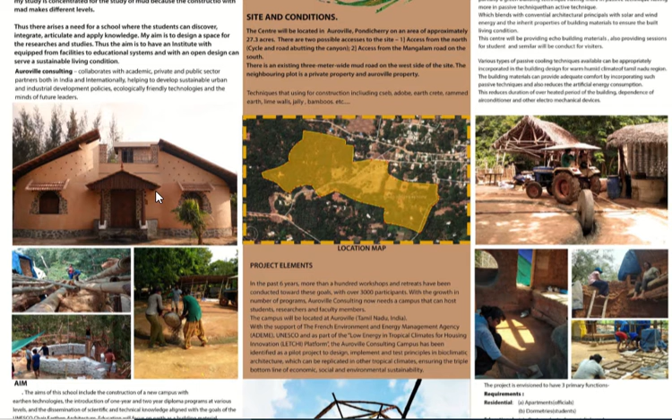This is a house made of mud. The walls use mud, and wood as purlins and other joinery. This picture shows that mud construction without any substitution is possible.

This house is in Auroville, where they practice different kinds of methods and techniques, improving the sustainable way of living and sustainable construction techniques.

The aim of the project is for the school to include the construction of a new campus with earthen technologies, introducing one-year and two-year diploma programs at various levels.

The objectives are to create a campus as a living laboratory of sustainable living, identify and implement good practices, and strengthen the design and construction of the campus so it is replicable in other tropical climate zones, taking present as well as future needs into account.

This is the site. It's in Auroville, having 27.3 acres of land.

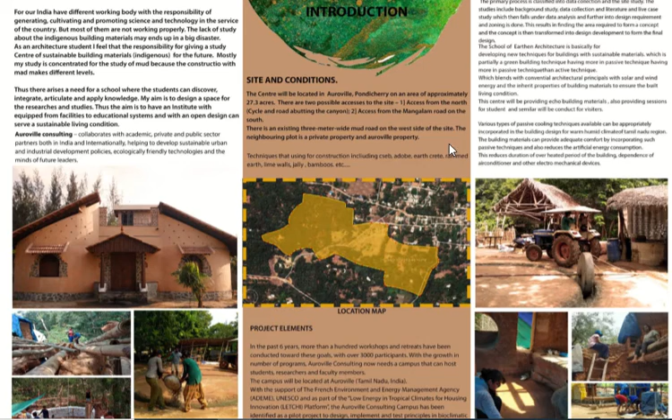It lies between the international and industrial zones, so the construction of the campus is possible according to Auroville laws.

The School of Earthen Architecture is basically for developing new techniques for building with sustainable materials, partially using green building techniques, with more emphasis on passive techniques than active techniques.

This center will provide eco building materials and sessions for students, and seminars will be conducted for visitors.

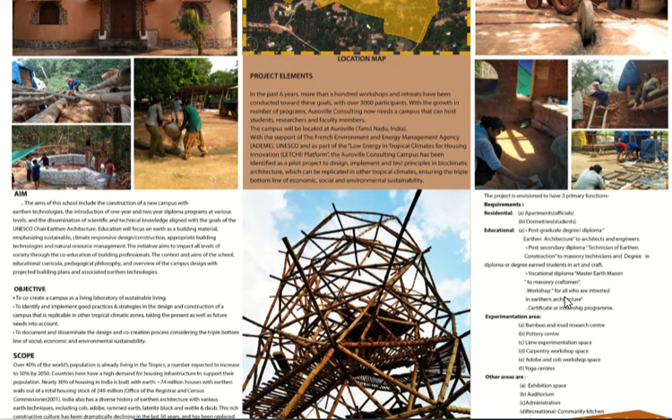The project is envisioned to have three primary functions: one is residential, another is educational, and another is an experimentation area.

Residential apartments and dormitories, and educational programs including postgraduate, post-secondary diploma, and vocational diploma levels.

The vocational diploma covers bamboo and mud, along with certificate and internship programs, and workshops are also conducted.

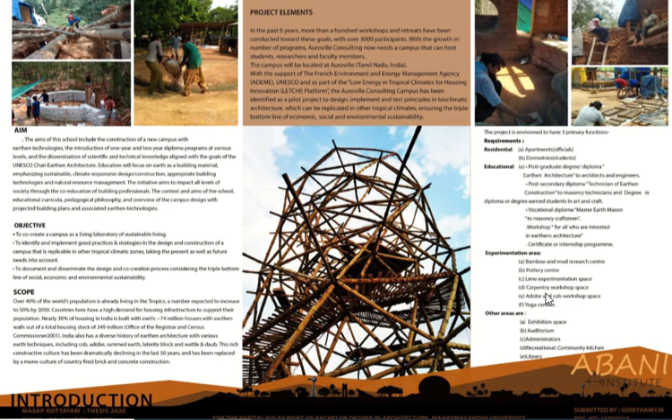Experimentation areas are also provided, like a bamboo and mud research center, pottery center, lime experimentation center, carpentry workshop spaces, Adobe cob workshop spaces, and a yoga center.

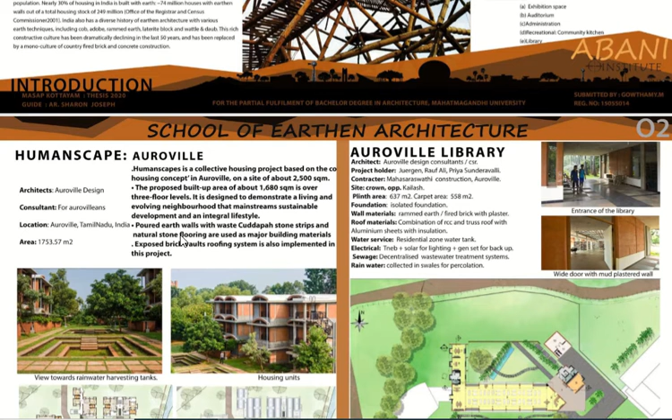The first case study I took is Humanscapes in Auroville. I chose this space because it helped me understand the materials they use for high-rise buildings as a sustainable material.

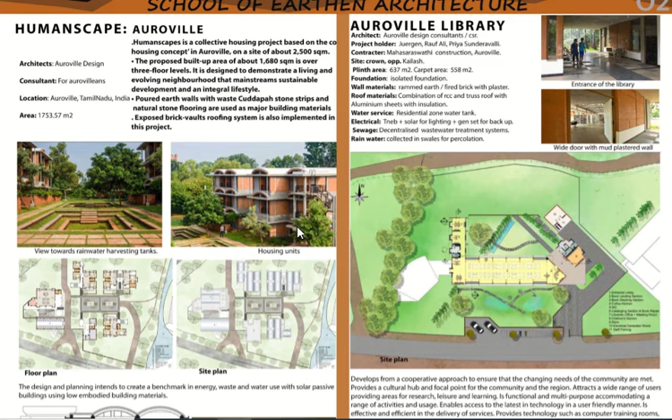They use poured earth and a vault roofing system, which helps in implementation and also helps bear the load easily.

Exposed brick vault roofing systems are also implemented in this project because they help with thermal insulation, and exposed compressed stabilized earth blocks are also used.

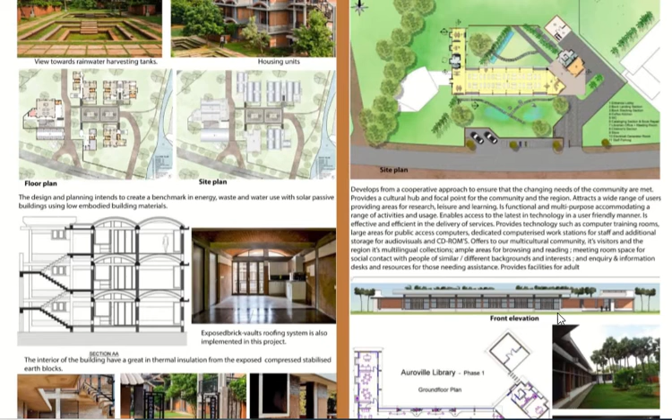The second case study is the Auroville Library. I used this because they use different kinds of seating spaces.

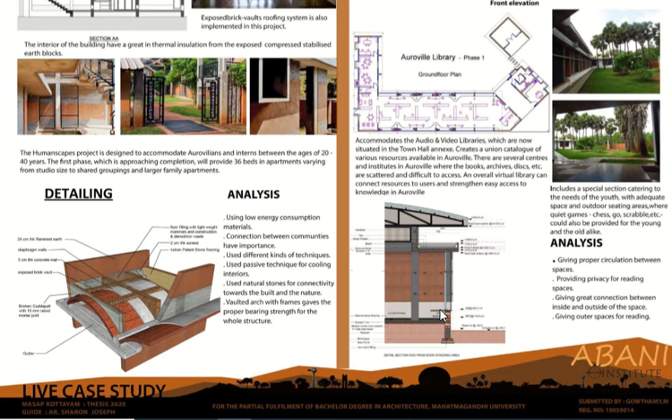They used proper bedding-type seating spaces so that someone can sleep or lie down and read, giving maximum comfort to the student or person using it.

The third case study is the solar kitchen. I took this because I am also providing a solar kitchen in my campus design.

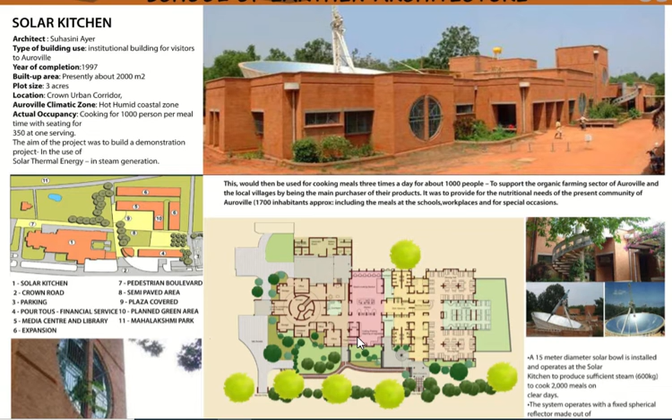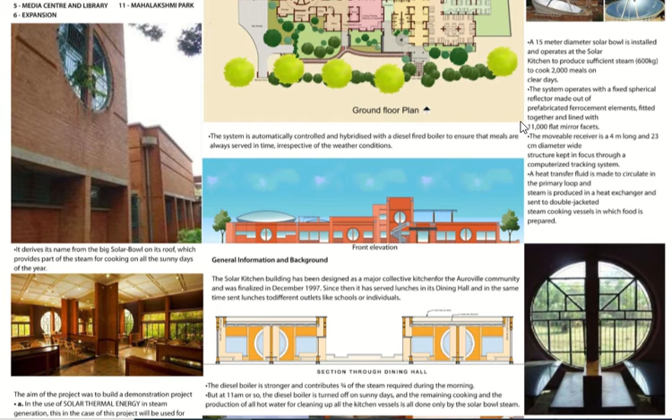The solar bowl is tilted 12 degrees towards the south, and a 15-meter diameter solar bowl is installed and operated as a solar kitchen to produce sufficient steam.

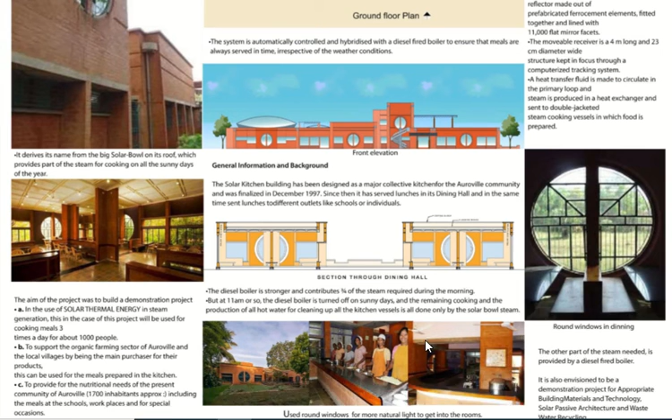They use circular windows because they help let in maximum sunlight without the need for artificial lights, and these round windows came from the solar bowl concept.

The next one is the Visitor Center, an institutional building for visitors who are visiting Auroville.

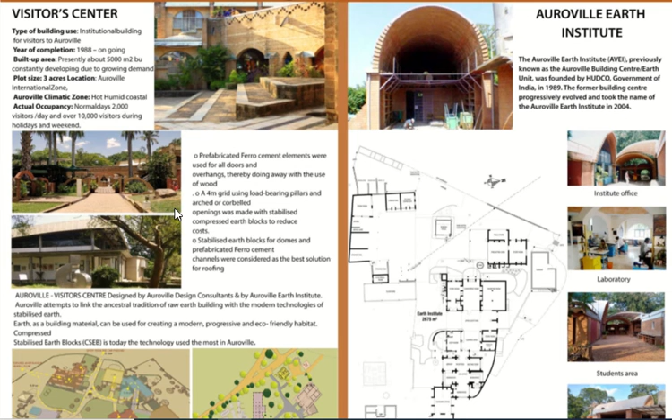The visitor center provides information about Auroville, its books and culture, what kind of education system they provide, and what kind of sustainable systems they lead.

This system helped me understand what a proper visitor center should be.

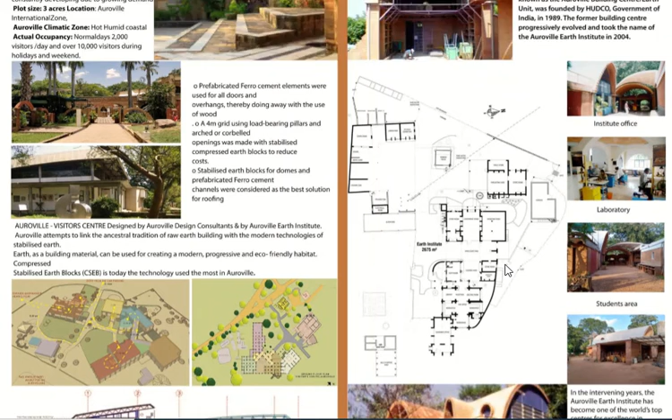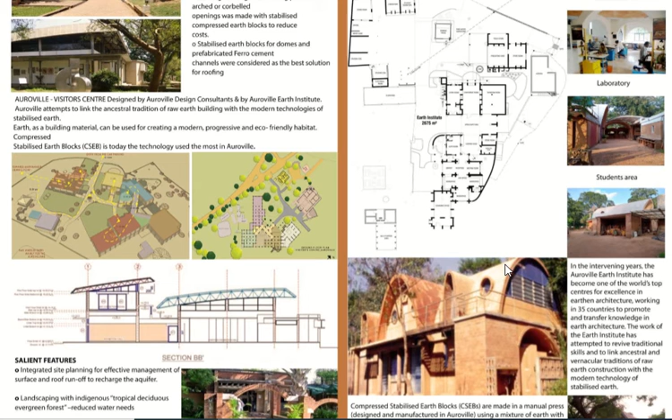The next is the Auroville Earth Institute. It is an institutional building where they are experimenting with different materials, particularly CSEB, and experimenting on columns with CSEB, and beams, double beams and triple lintel kind of beams.

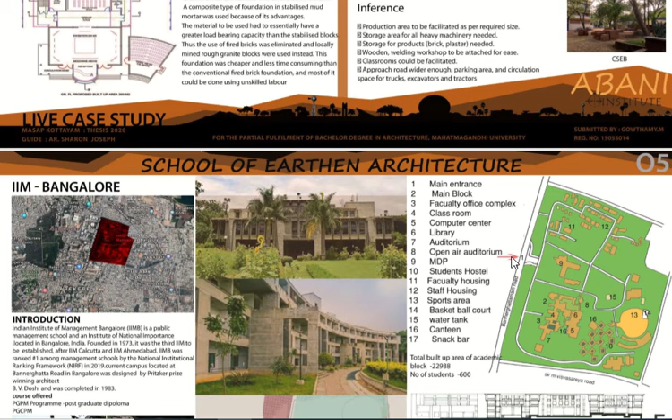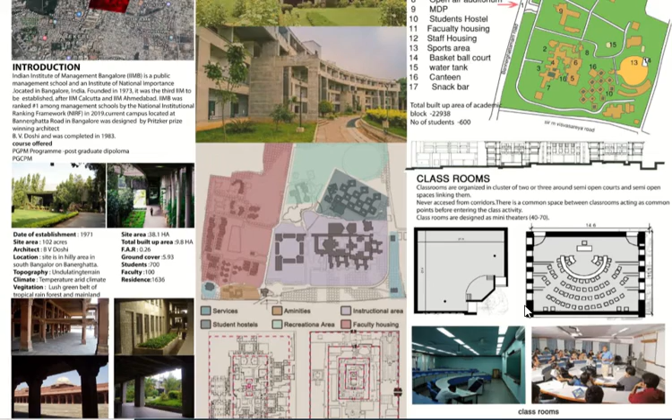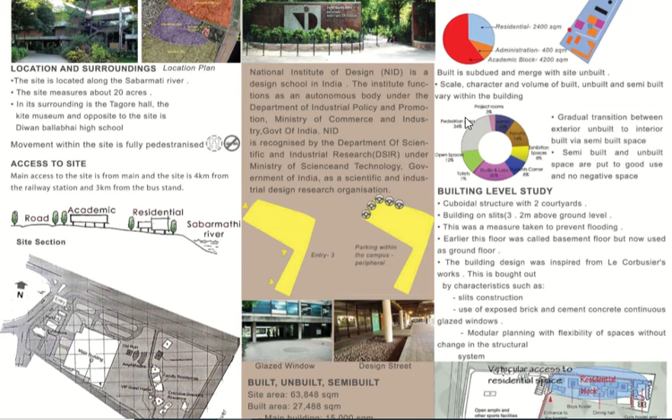The next one is the National Institute of Design in Ahmedabad. I took this because they have a well-functioned academy, having a basement plan that's fully pedestrianized, and the ways they used the basement are basically for segregation purposes and all.

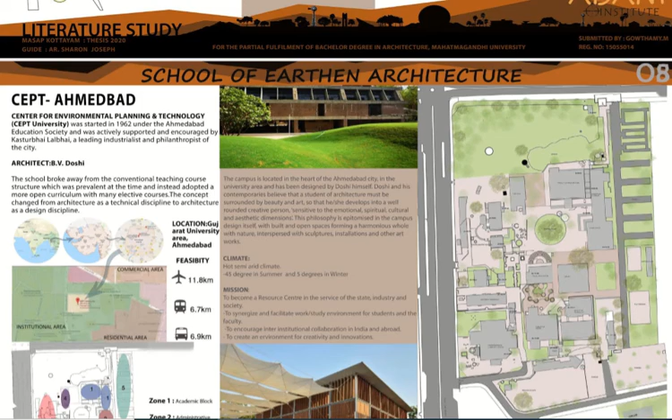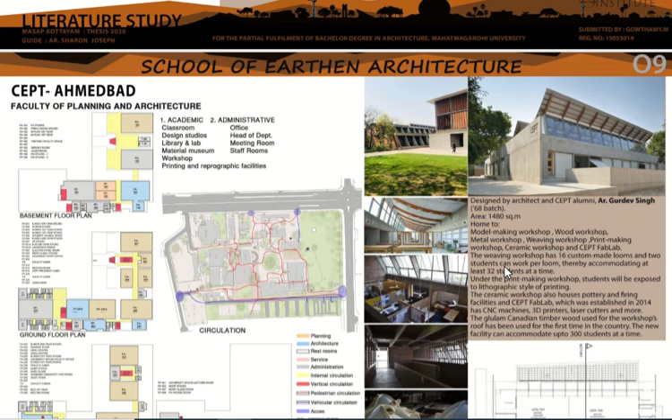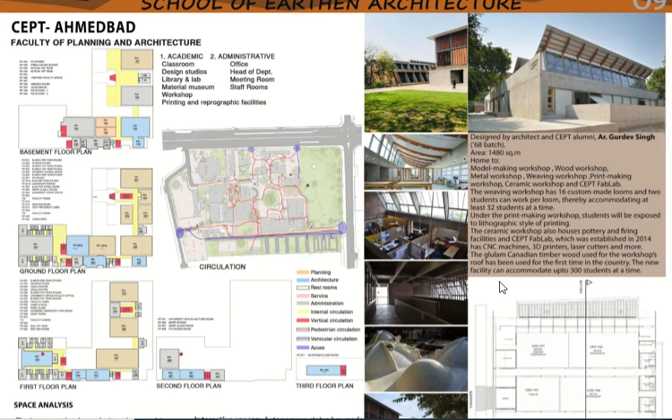The next is CEPT Ahmedabad, designed by B.V. Doshi. I took this study because it has a very well designed workshop space, designed by architect Gurdev Singh, with an area of 1,480 square meters. The roof construction is built in a shape curve, or inverted archway, which helps maximum natural sunlight enter the room. That's why I took this as my other case.

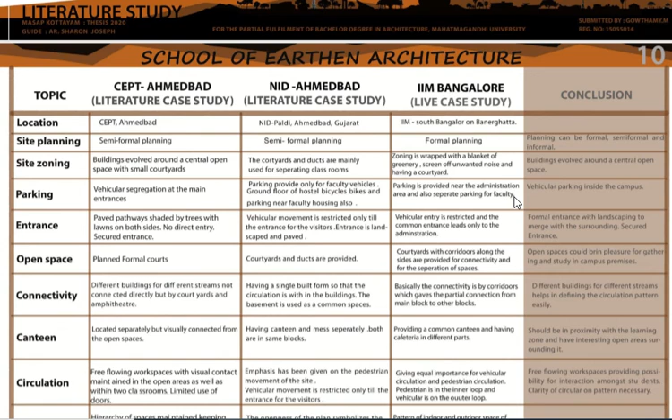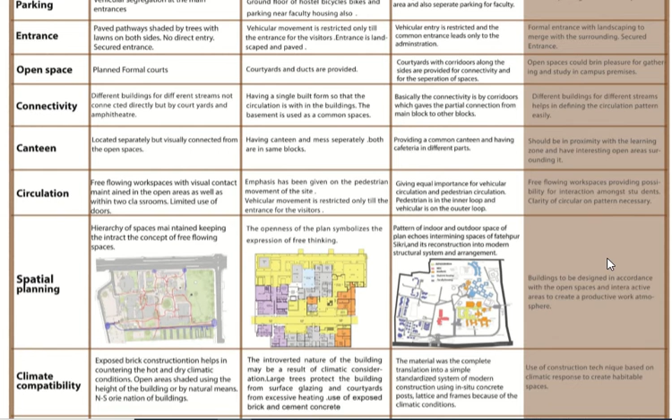Now the conclusion and comparative analysis. I think I can start from circulation: it should be free flowing workspaces, providing possibility for interaction among students, with clarity of circulation pattern necessary. For spatial planning, the building design should be in accordance with open spaces and interactive spaces. For the structural system, building height should be restricted to G plus 2 max.

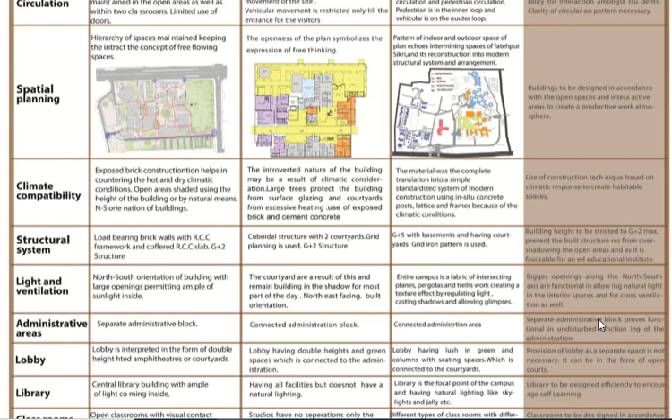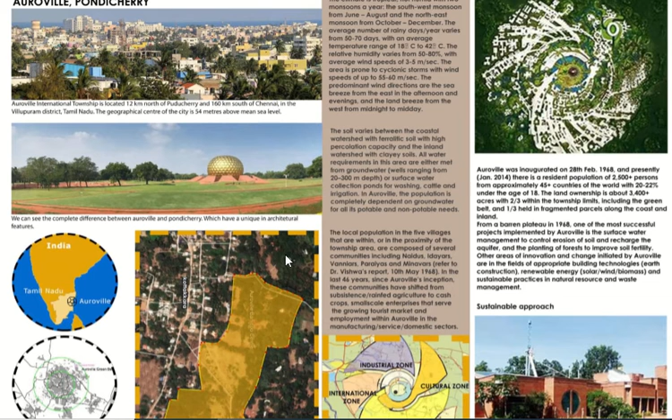Auroville Pondicherry is the site, so you can see the difference between Pondicherry and Auroville. My site actually lies in exact Auroville, between the industrial zone and the international zone.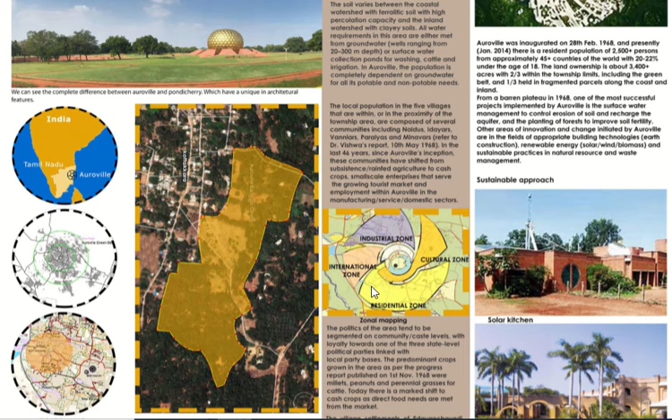So in the international zone, my site is actually better for both the institution and for the international and industrial zone and everything.

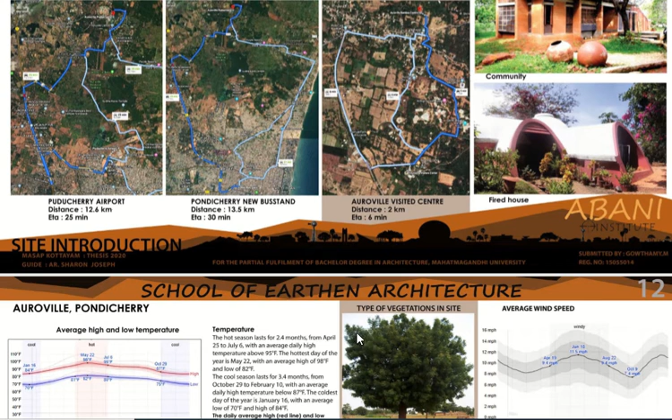The distance from Pondicherry is 12.6 kilometers, and we can see that there are fired houses and community and visitor centers, and many kinds of sustainable approaches are practiced there.

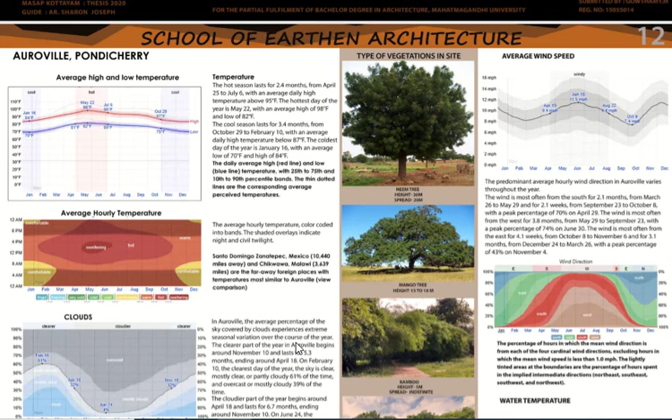From the analysis part, the maximum temperature is from April 25th to July, with an average daily high temperature. In Auroville, the average percentage of sky covered by clouds experiences extreme seasonal variations over the course of the year. The clearer part of the year begins around November 10th and lasts for 5.3 months. For rainfall, the rainy period lasts for 9.6 months, from April 1st to January 22nd.

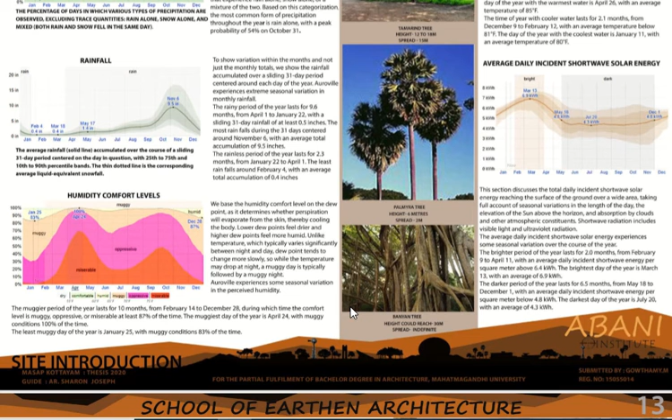The trees in Auroville are banyan tree, palmyra tree, tamarind, cashew tree, bamboo tree, mango tree and neem tree. The palmyra trees are actually very good for building construction.

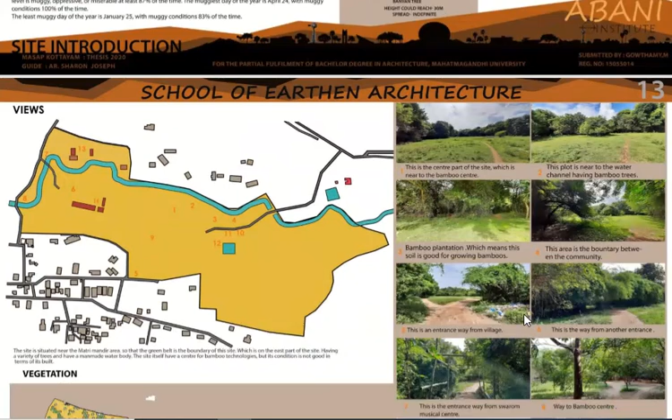The site has good views. The center part of the site is near the bamboo center, an existing bamboo center, but it is not in good condition. The plot is near a water channel, having a small man-made water channel here, and there is also an existing water channel.

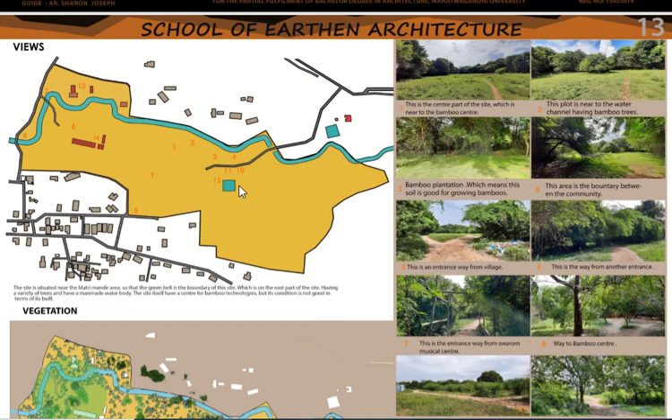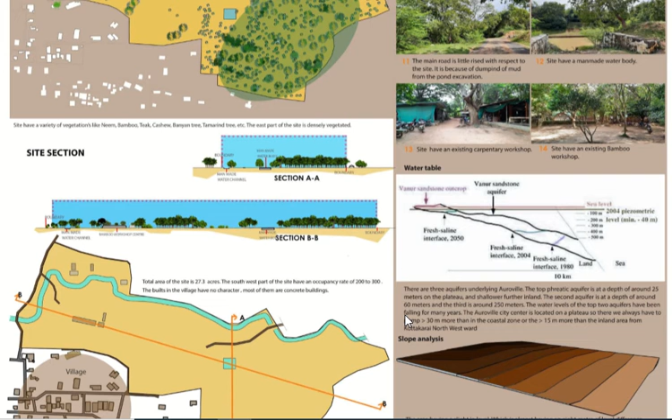The vegetation is divided into two areas: here is densely vegetated, and this one is bamboo vegetated area. This is a site section, and Auroville has an aquifer at depths up to 25 meters on the plateau to 60 meters and above.

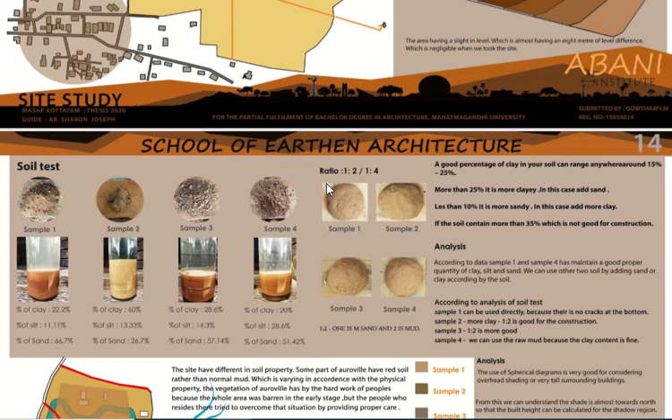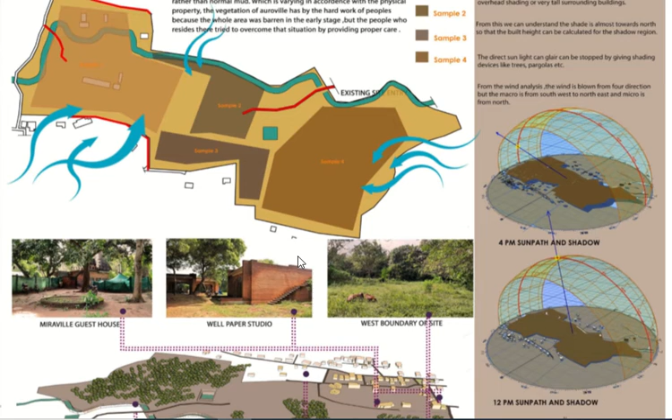There is a slight slope towards the northeast direction. From the soil test, the good soil is actually from sample 1 and sample 4, because the silt and clay content is comparable. That's why. And these are the nearby areas, the nearby built spaces.

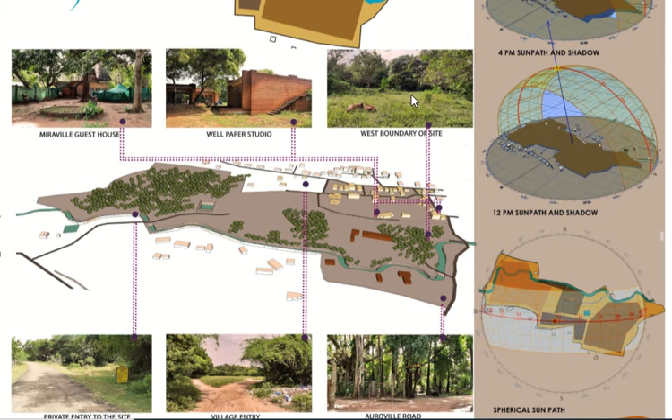There is a Miraville Guest House near our site, and Well Paper Studio is there, and the west boundary is here, this part, with a private access road here, and here is a village entry. This one is the Auroville road.

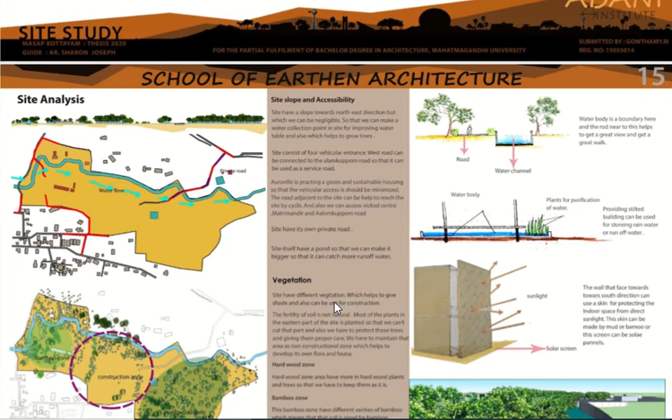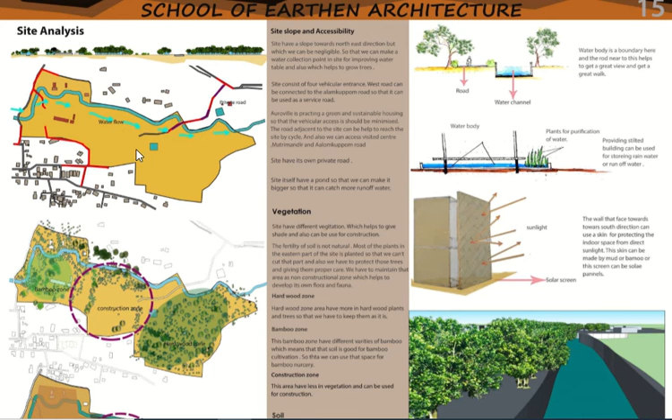From the site analysis, the site has a slope towards the northeast direction, but it can be negligible, so we can make a water collecting point in this part. It will help collect more water from the whole area.

Also, from the vegetation, this part is more dense than this part. And from the soil, yes, this part is actually more clayey than these two parts, and this one is more completely fertile. So we can use this part as well for construction.

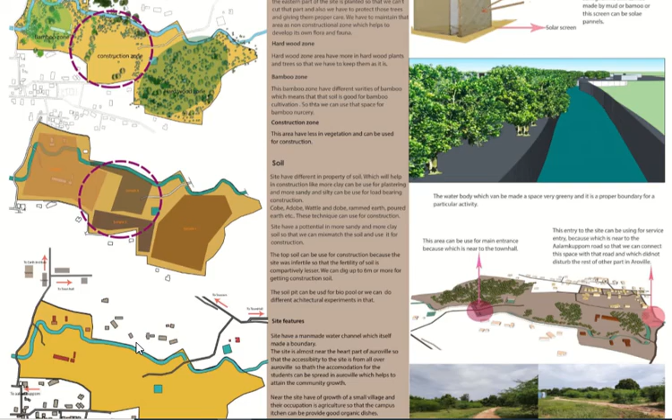For site features, the site already has an existing feature, but we can use this space for future constructions and all.

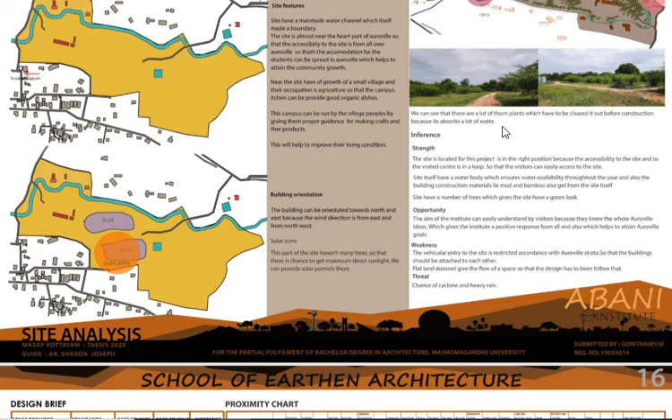This part is a solar zone because it is the south part of the site, so we can get direct sunlight here, and the trees are very minimal here, as we can see from these figures.

The strength is that the site is located in the right position for this project because of the accessibility to the site, and the opportunity is that the aim of the institute can easily be understood by visitors, because they knew the whole Auroville ideas.

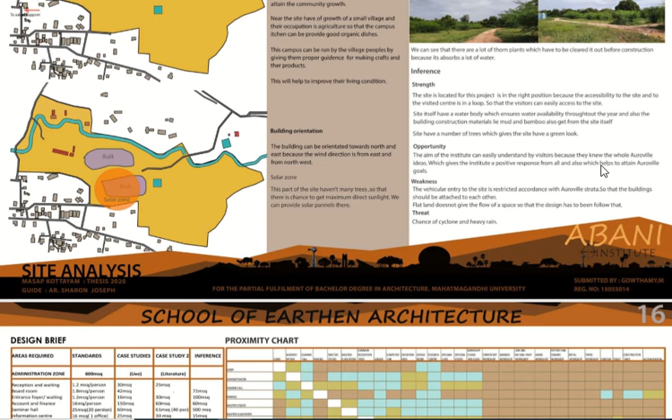The weakness is that the vehicular entry to the site is restricted. There is also a chance of cyclone and heavy rain.

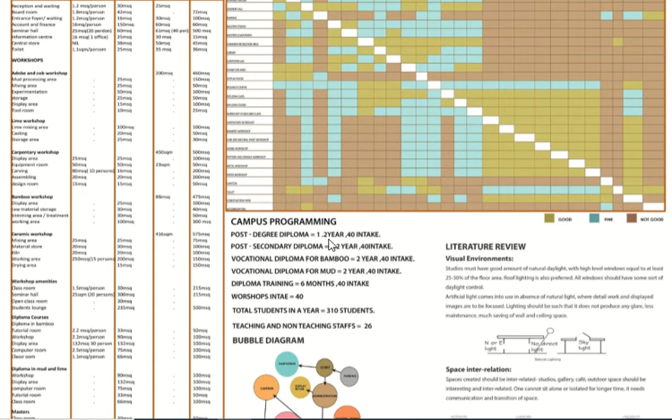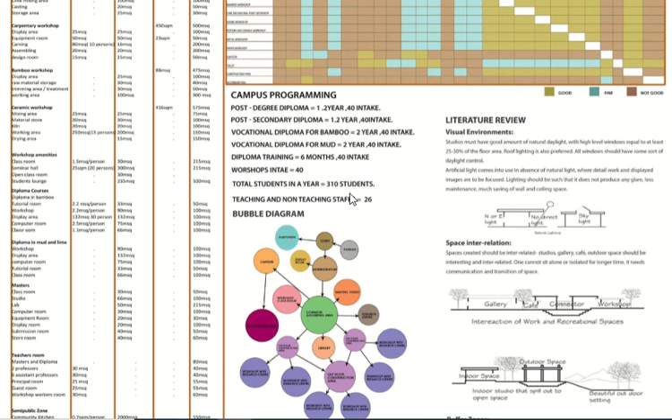This is the design brief and campus programming. The postgraduate degree diploma is for 1.2 years with 40 intake, post-secondary diploma is 1.2 years with 40 intake, vocational diploma in bamboo is 2 years with 40 intake, and for mud it's 2 years with 40 intake. Diploma training is 6 months with 40 intake. Workshop intake is 40, total students 310, and 26 teaching and non-teaching faculties.

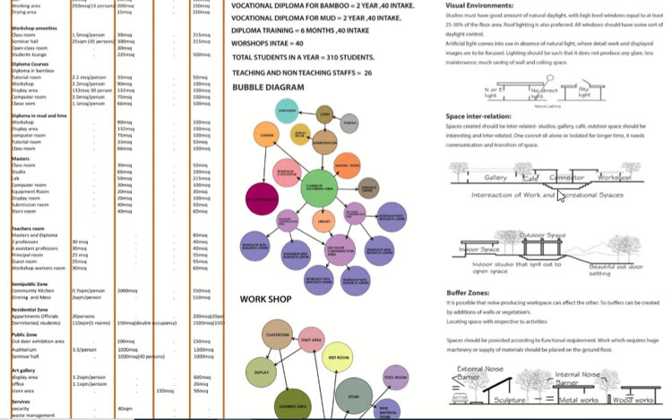This is the literature review, showing how the spaces can be segregated: gallery, workshop, and in between giving a trench or something like that, along with buffer zones and all.

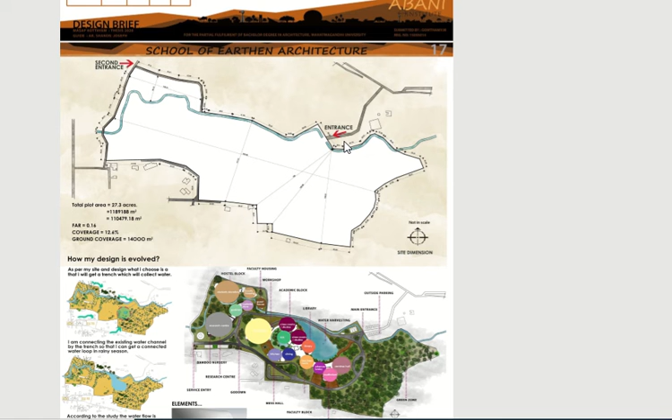And yes, this is the site. This is the site, having an entrance from the north, and a second entrance which is a private entrance for the accommodation.

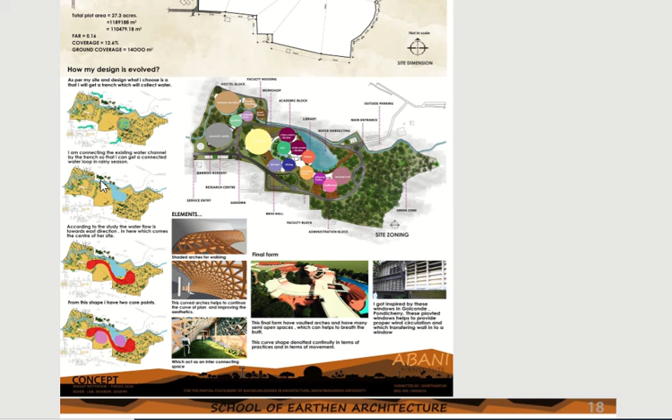Here is how the design evolved, having a small slope towards east. There is already a water body here, a water channel. So what I did is trench here to collect most of the runoff water and connect it to the existing water body.

From this shape I got a curve shape. I used a curve because even the site itself has a curve structure, like the water body is curved. That's why I chose a curve structure, so it matches with the water body. That's why I took this.

From the shape, I get two intersecting spaces, so the students can be segregated in here and also here. From that, I got a zonal map.

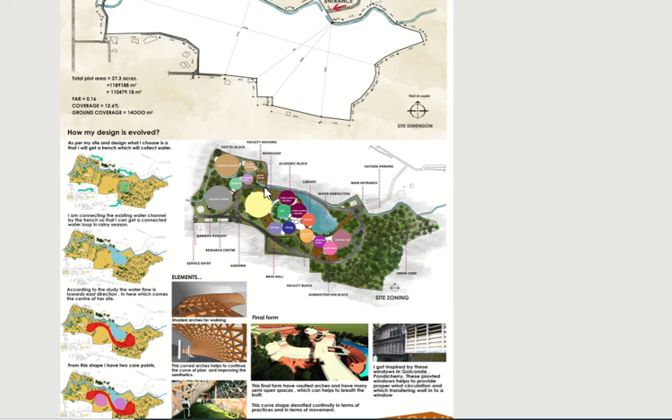This is the administration area, the hall part is administration area. This is the institutional area, and this is the research area, and this part is the accommodation area. The elements I used are, since it's very hot in summer in Auroville...

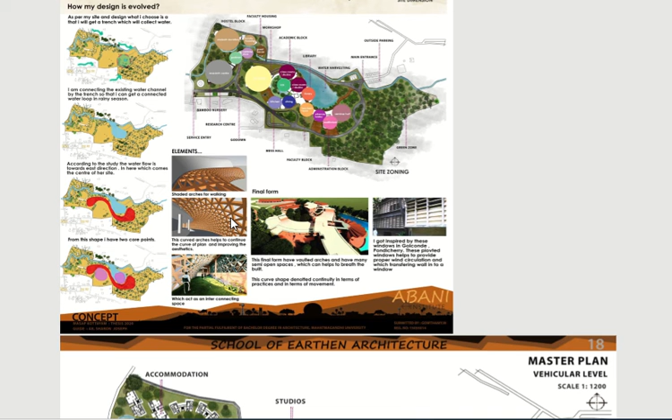I used a vault kind of roof, which can act as a roof system. I used brick and iron rods for this construction.

I also got inspired by the windows from Golconde in Pondicherry, these vertical pivoted windows. And this is the master plan, having a water channel and parking here.

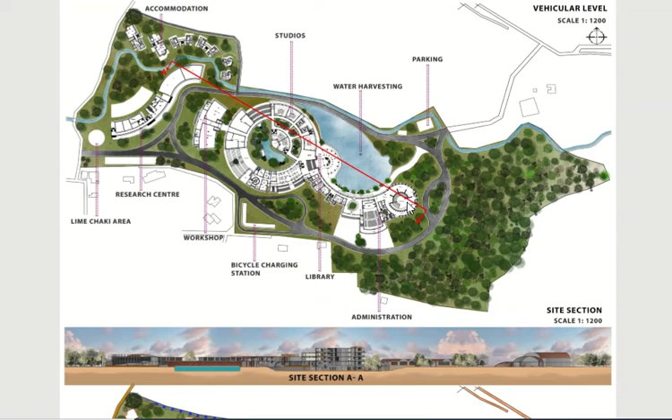The studio is here, the administration is here, the library is here, and the bicycle charging plot is here because the southern side is here. So it's much more convenient to provide a cycle charging plot here.

This is the kitchen, having a solar bowl here, and workshop 1 and workshop 2 are here, and this is the research center, and this is a bamboo plantation.

This is a lime chaki area, so the lime chaki can be prepared here and stored near to this, and can be easily accessible. I'm also providing a small storage area here.

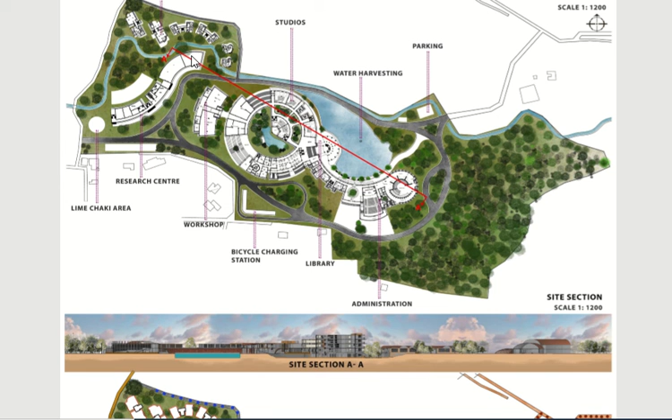This is the site section. This is the circulation - this one is the visitor circulation, and the blue one is the student circulation.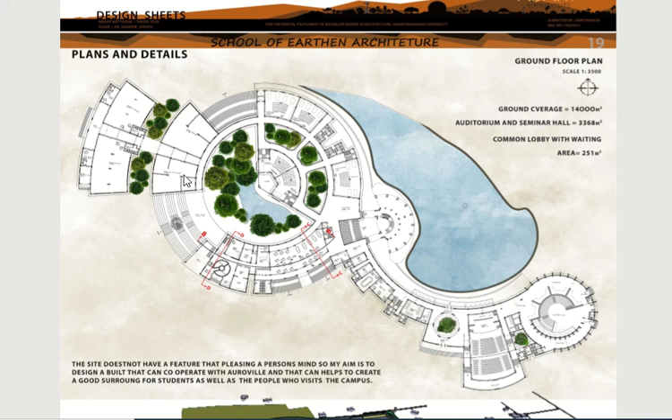The canteen is here, and the teacher block is here. The students block is here, and the lab and other common purposes are here. This is the workshop area, having a basement kind of structure here, so that they can segregate into the basement.

And this is a 3D block model.

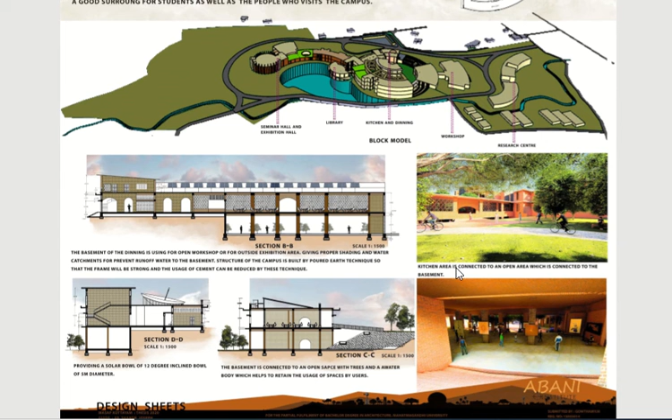This is the kitchen area, having lots of trees and shade. This is the basement under the kitchen part, so this space acts as an exhibition area.

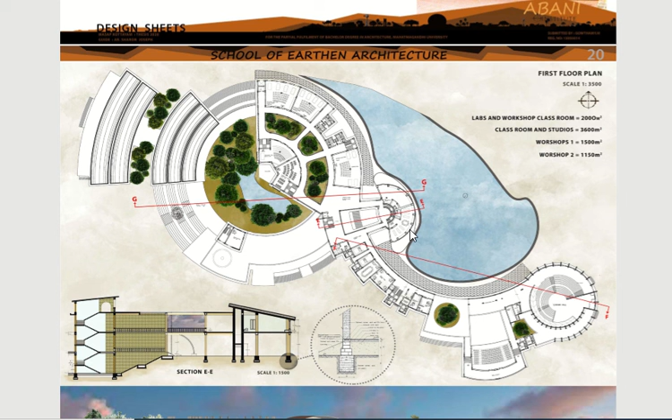And this is the first floor, having curved arches, and the library.

And this is the detailing of the footing. It's a CSEB footing, a normal CSEB footing, and this is a sectional view, and this one is a side view.

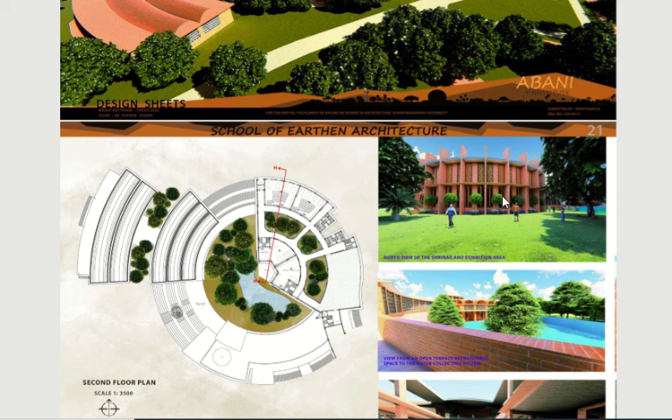And this is the administration, and this one is basically the exhibition and the seminar hall.

This is the way to the basement and to the library block. And this is the amphitheater block, and this is a view from the amphitheater, and this is the basement floor plan.

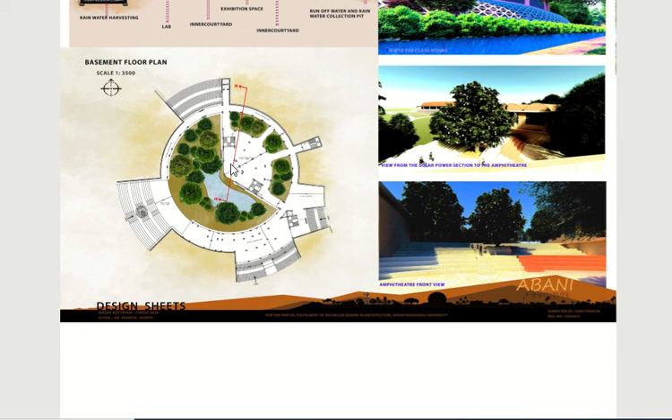Having a very long basement here, and this part is for conducting the exhibition areas, and this one can be used for the workshop spaces, outdoor workshop, and this place is actually for recreational areas and so on.

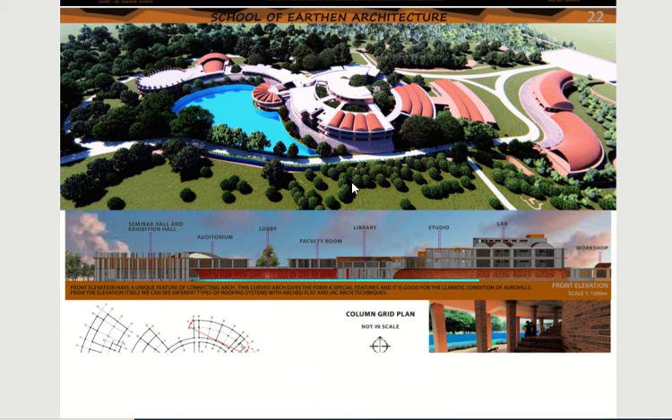This is the front view, a bird's eye view, and this is a front elevation of the site.

Seminar hall, auditorium block is here. This is the lobby part, faculty room, library, studio section, lab, and workshop.

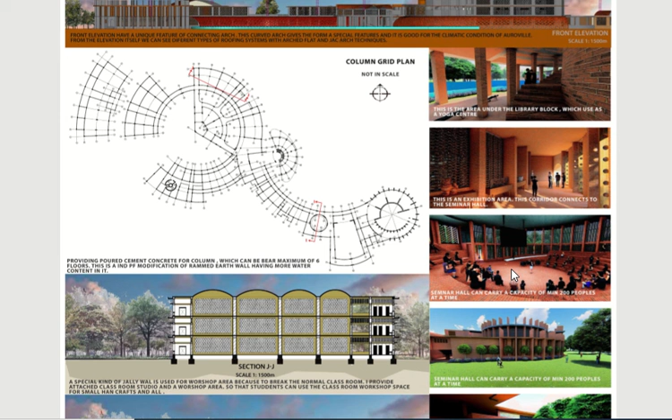This is a grid, column grid plan, and these are the areas they commonly use and specially designed, having a seminar hall, and underneath that the exhibition comes.

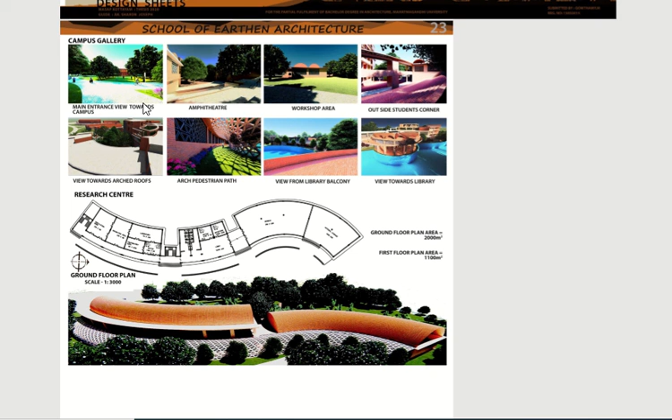And this is the campus gallery, having a research center. This is the research part, and this one is for the godown and for the material storage area, around an area of 2000 meters square.

First floor area is 1100 meters square.

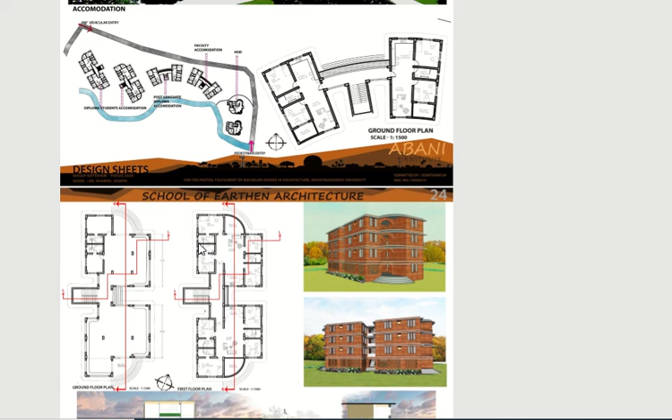For the accommodation, I planned it in three ways: these two for the HOD and the principal, this one is for the faculty, and this is for the postgraduate, and these two are for the diploma students. So having one bedroom with attached toilet, one bedroom with common toilet, and one more bedroom.

And one kitchen and one dining, eight in an apartment, in that manner. And this is a physical model.

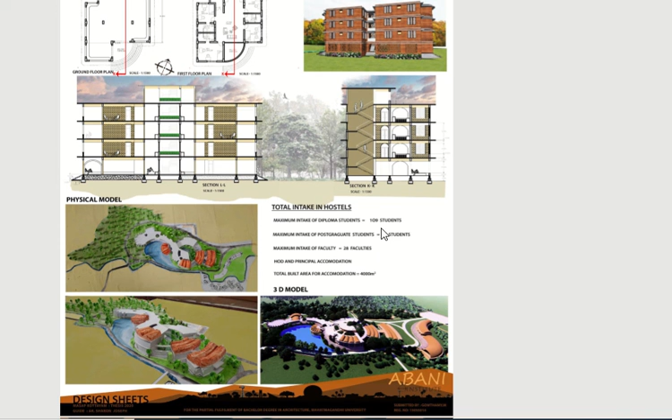The total intake in the hostel is 109 students, 32 students for the postgraduate, and faculties are like 26 faculties. Total built up area is around 4000 meters square.

And these two are the model, and this is a 3D model, bird's eye view.

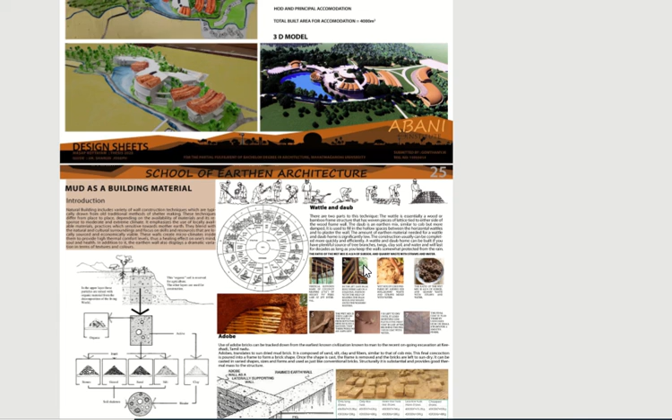My special topic is mud as a building material. So cob and adobe, poured earth, CSEB, and rammed earth walls are what I'm mainly focused on, because CSEB, poured earth, and rammed earth are very good.

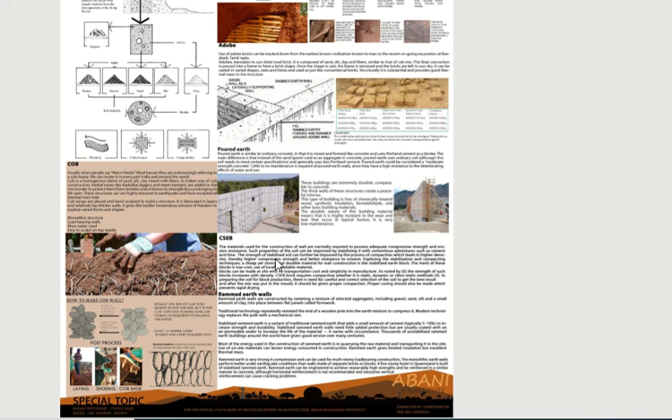We can use that for the foundations, and also for the bearing walls. So I use that, and basically adobe and wattle-and-daub adobe is for the separation walls. Thank you.